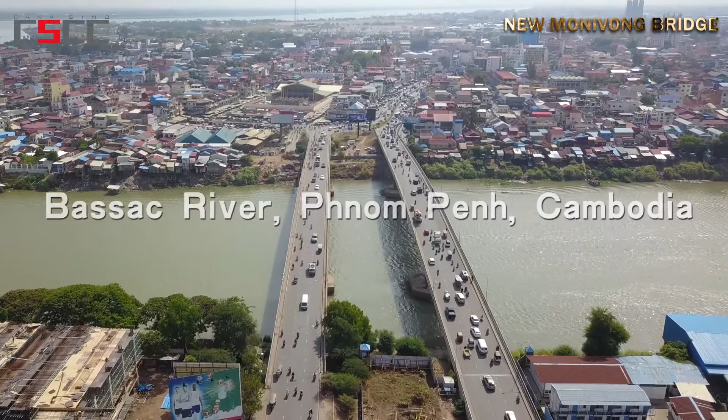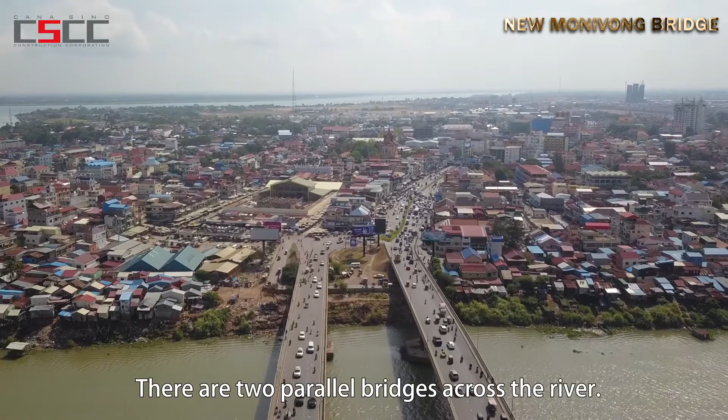Bassac River, Phnom Penh, Cambodia. Located at the intersection of the Chamkarmon, Meanchey, and Chbar Ampov districts. There are two parallel bridges across the river. These are the Monivong bridges that connect the East Bank and the West Bank.

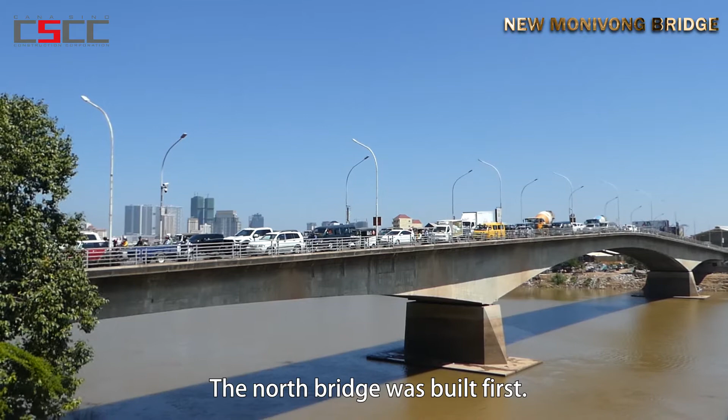These two bridges were not built at the same time. The North Bridge was built first. After that, Cambodia fell into a war for many years. It was not until the end of the century that the war gradually subsided. After entering the 21st century, the political situation became increasingly more stable. As the country developed, the original bridge became more and more congested.

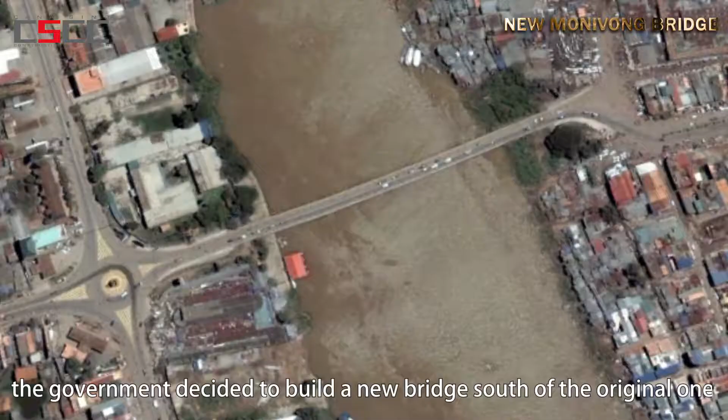For this reason, in 2006, the government decided to build a new bridge south of the original one. The new Monivong Bridge was built to improve traffic. Overseas Cambodia Investment Corporation invited Vietnam-based Cana Sino Construction Corporation to submit a tender, which they ultimately won, attaining the opportunity to take on this project. Since then, a journey of cooperation between two parties began.

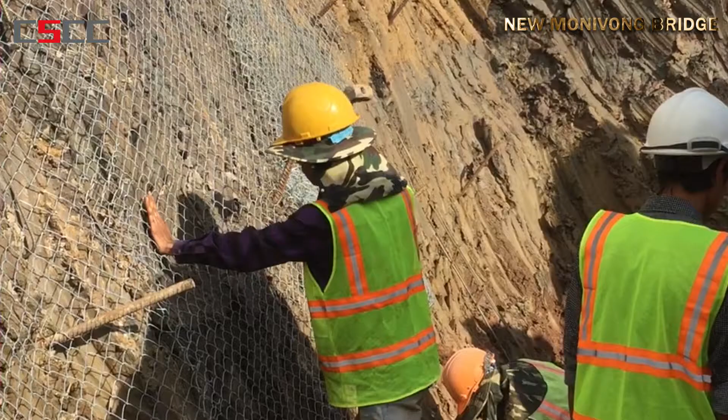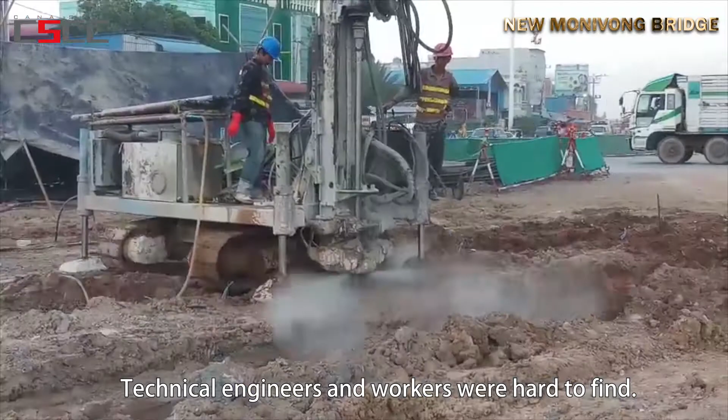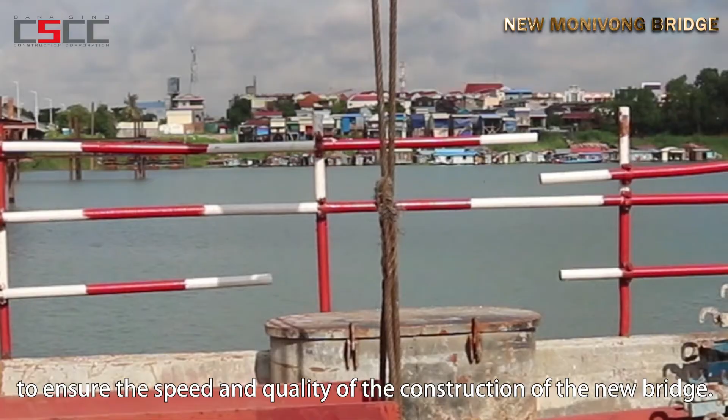The Civil War caused a lag in Cambodia's development. Technical engineers and workers were hard to find. Most construction sites used outdated equipment. To this end, the project team explicitly introduced barges, drilling rigs, cranes, and other materials from abroad to bring into this project to ensure the speed and quality of the construction of the new bridge.

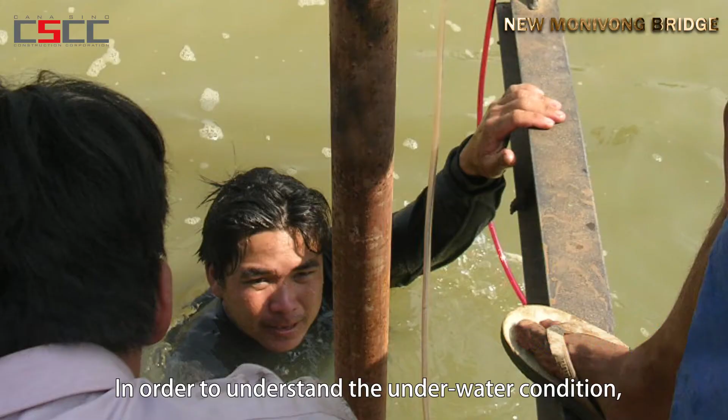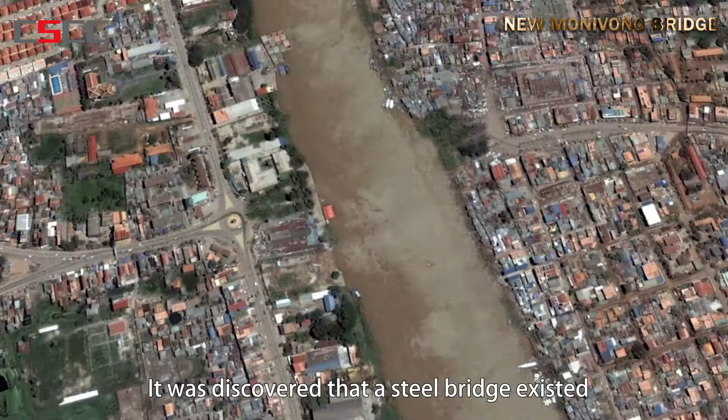During the construction of the bored pile foundation, the project team encountered a thorny problem. Some pile casings could not be placed on their expected positions. In order to understand the underwater condition, the project team not only performed further geophysical prospecting for the riverbed, but also searched around the vicinity. It was discovered that a steel bridge existed at this very location before. It eventually collapsed in the riverbed of the proposed construction area.

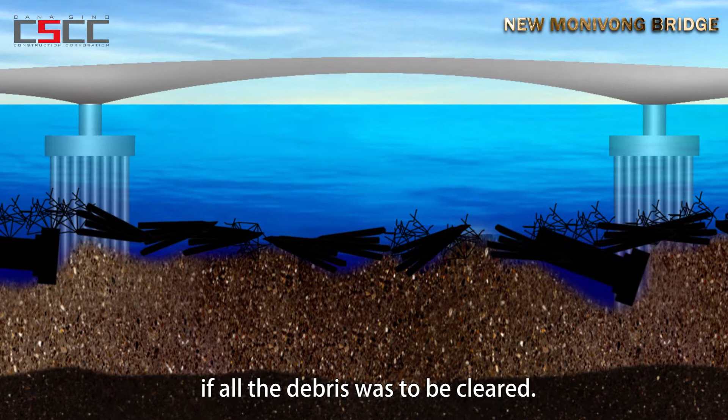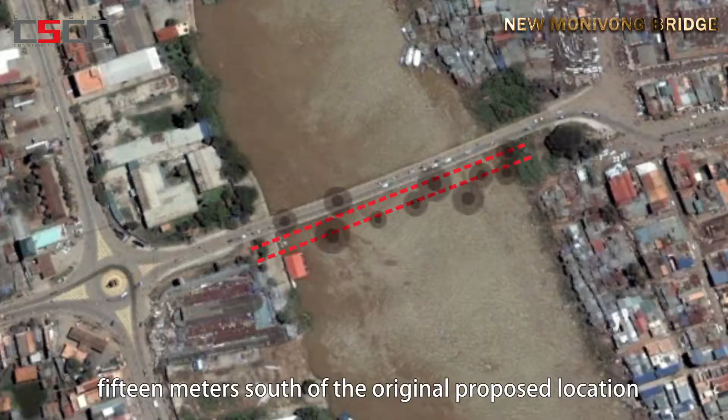A large-scale salvage effort would be necessary. If all the debris was to be cleared, this would affect the safety of the current existing bridge. The project team decided to move the location of the proposed bridge 15 meters south of the original proposed location, to avoid the debris and reduce the salvage range. In general, there were three types of debris to clean up.

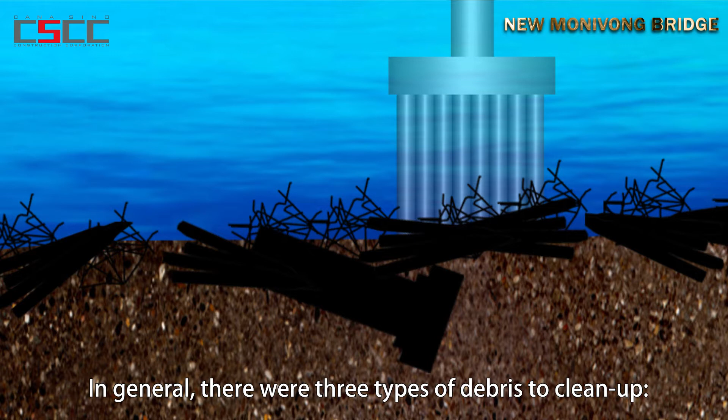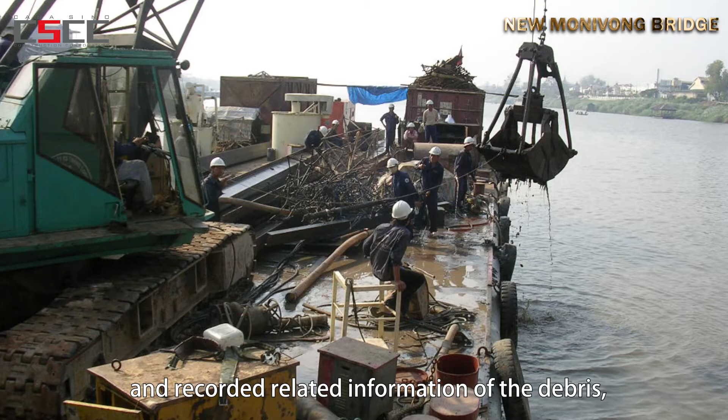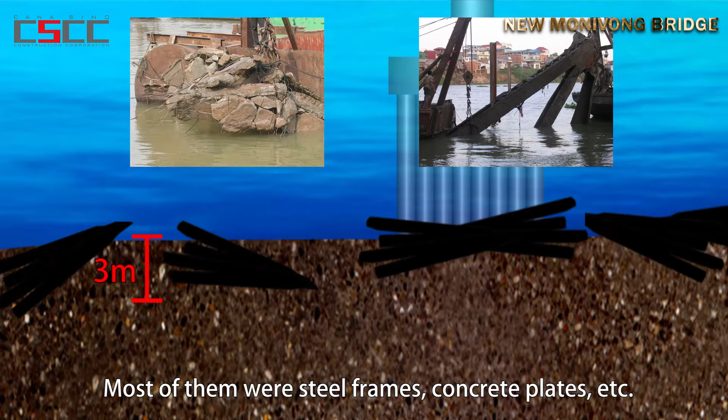The first was the debris lying on the surface of the mud. Most of them were rebar, wire meshes, etc. The project team tied floating empty bottles to the debris, which helped mark the position, count the number, and record related information of the debris, and enabled the team to salvage them one by one. The second kind was the debris buried 3 meters below the surface of the mud. Most of them were steel frames, concrete plates, etc. It was necessary to pump the surrounding mud first in order to increase the exposed portion of the target debris before salvaging it.

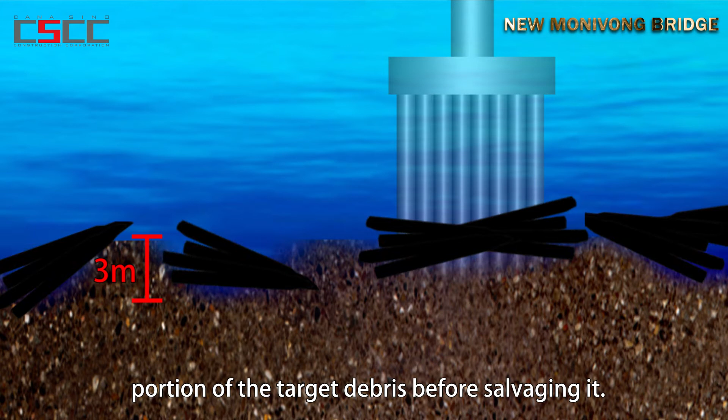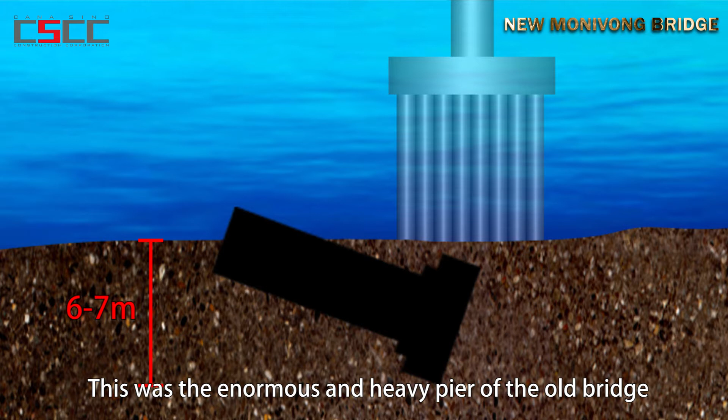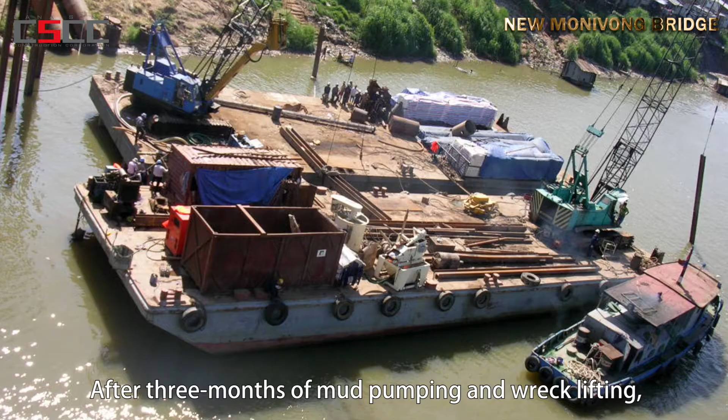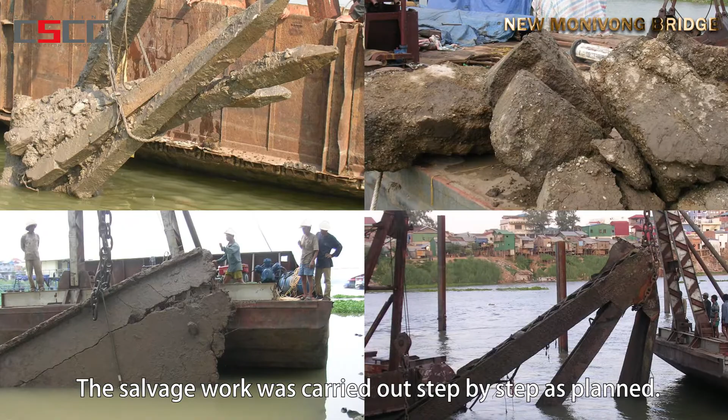The third kind was the debris buried 6 to 7 meters below the surface of the mud. This was the enormous and heavy pier of the old bridge that collapsed before. The size and weight greatly increased the difficulty of salvaging. After 3 months of mud pumping and wreck lifting, the target wreck could only be lifted to a location away from the construction location. The salvage work was carried out step by step as planned. With the completion of the cleanup, all steel casings could finally be placed in their expected positions.

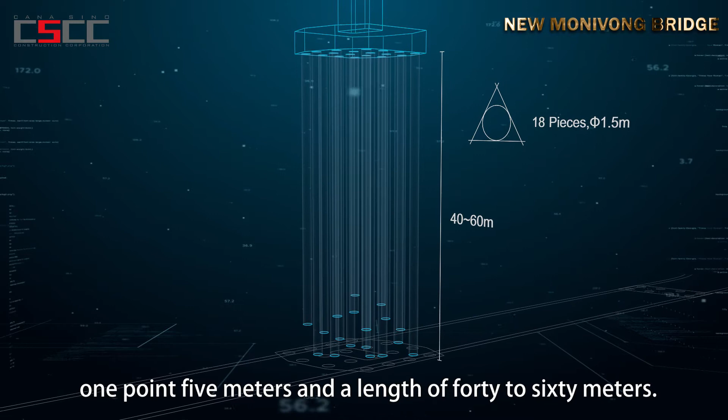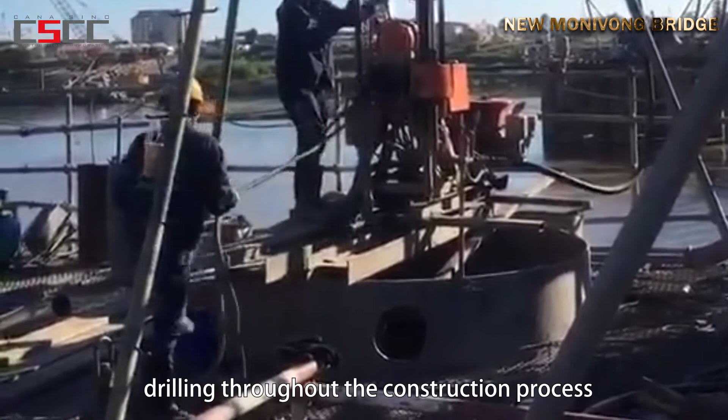The new Monivong Bridge was supported by 2 main piers. Each pier was composed of 18 piles with a diameter of 1.5 meters and a length of 40 to 60 meters. Each pile had a different length. This required the project team to keep performing the geologic drilling throughout the construction process, and substantially increased the difficulty of construction.

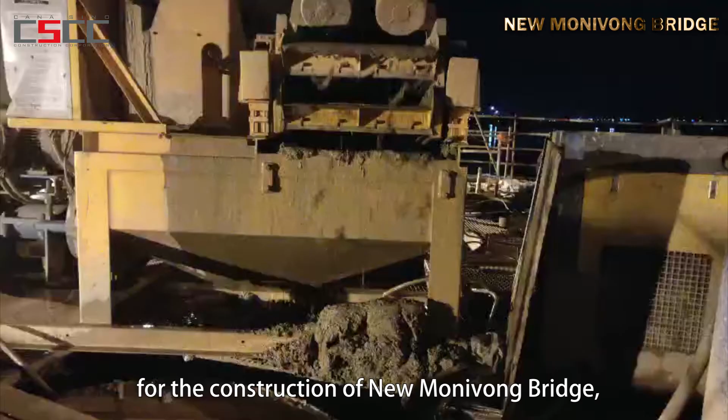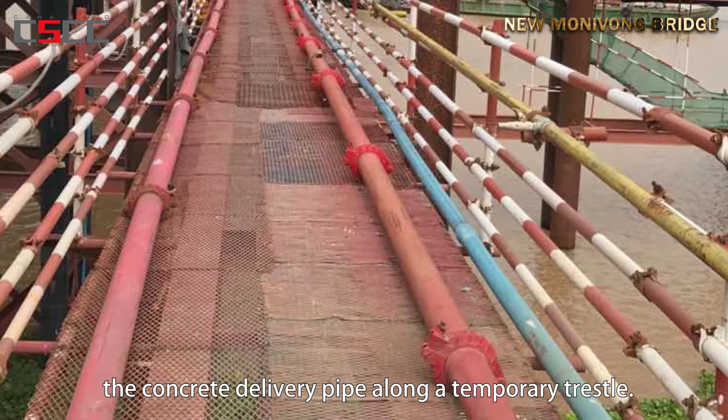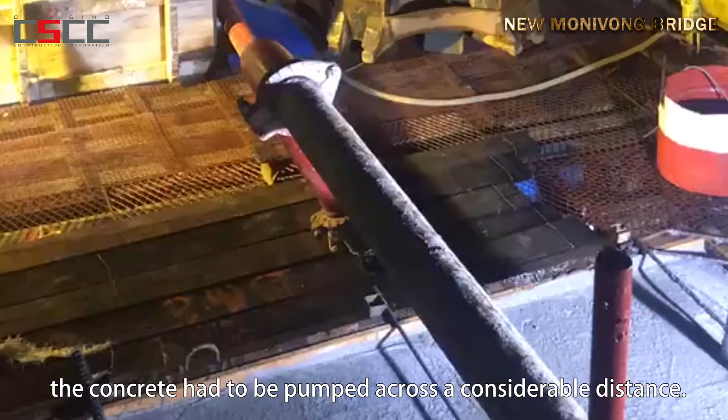As for the concrete needed for the construction of the new Monivong Bridge, 3 features were required: workability, flowability, and retardability. Why was the workability of concrete required? In order to save costs, the project team installed the concrete delivery pipe along a temporary trestle. The concrete was delivered across long distances. During the construction of the bridge, the concrete had to be pumped across a considerable distance. This could only be accomplished by using concrete with good workability. Otherwise, the concrete could block the delivery pipe or even cause broken pipes.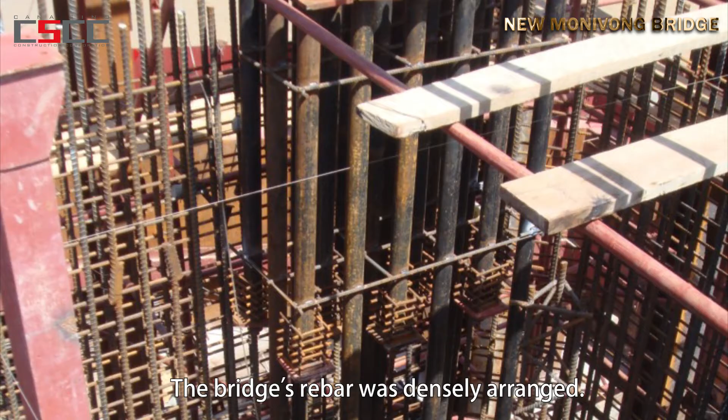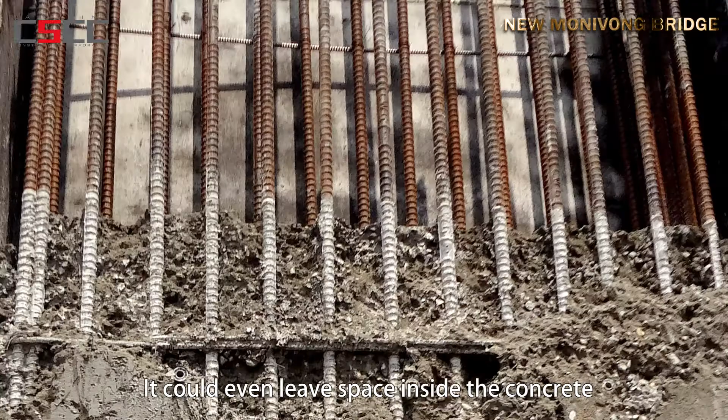Why was the flowability of concrete required? The bridge rebar was densely arranged. If the concrete flow was insufficient, it would experience difficulty in vibrating and the surface of the concrete would appear honeycombed and pockmarked. It could even leave space inside the concrete and cause the separation of concrete and reduce its strength. Concrete with high flowability has the benefit of more effective concrete pouring.

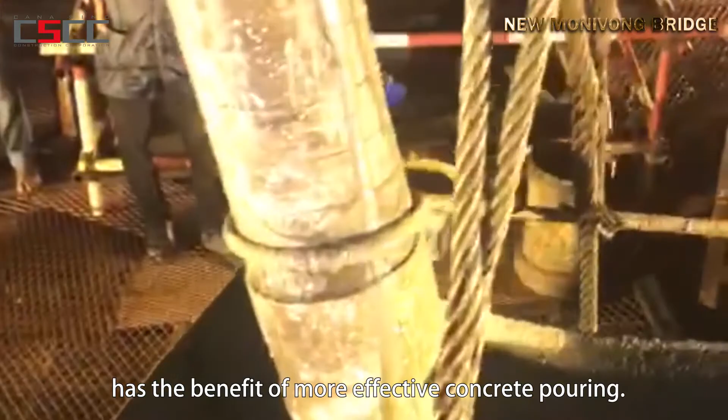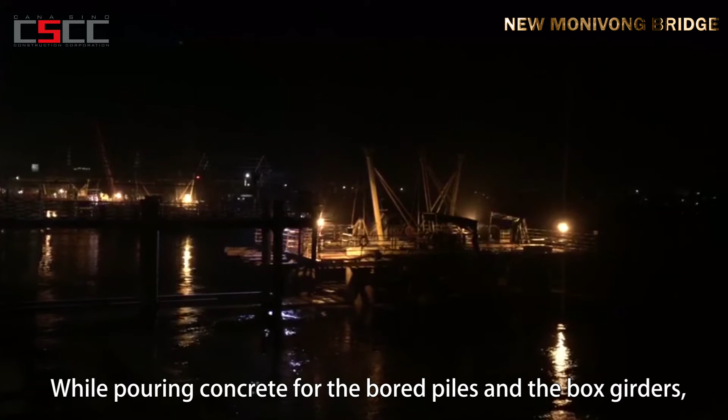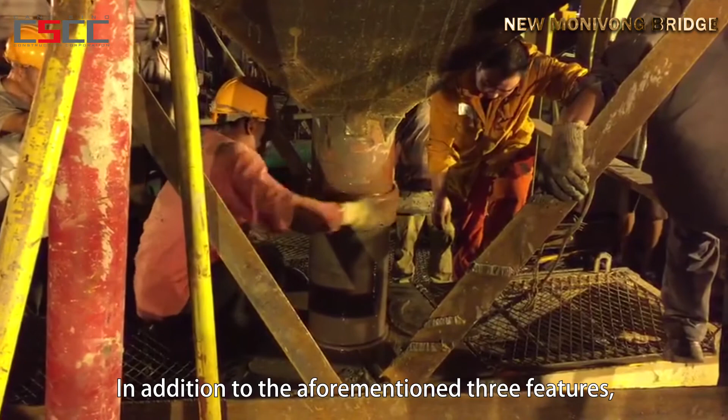Why was the retardability of concrete required? The normal initial setting time of concrete is between 1.5 to 2 hours. This type of setting time cannot meet the needs of the bridge construction. At least 5 hours are required for the concrete pouring of one bridge pile. In case an extraordinary situation happens, it may even take up to 8 hours. While pouring concrete for the bored piles and the box girders, cold joints can easily be created if the initial concrete setting time is too short. In addition to the aforementioned three features, both tensile strength and anti-cracking properties are required.

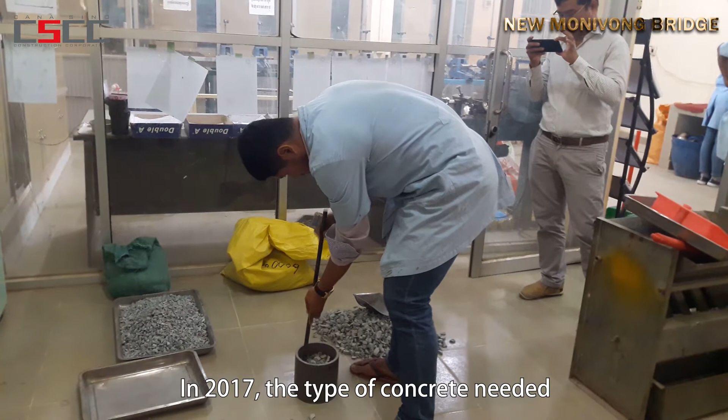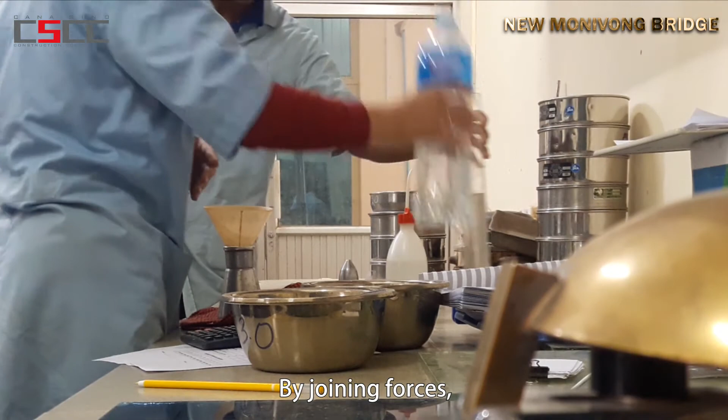In 2017, the type of concrete needed for the construction project could not easily be found in Cambodia. In order to produce satisfactory concrete, the project team provided technology to support local concrete batching plants. By joining forces, the team performed repeated rounds of adaptation.

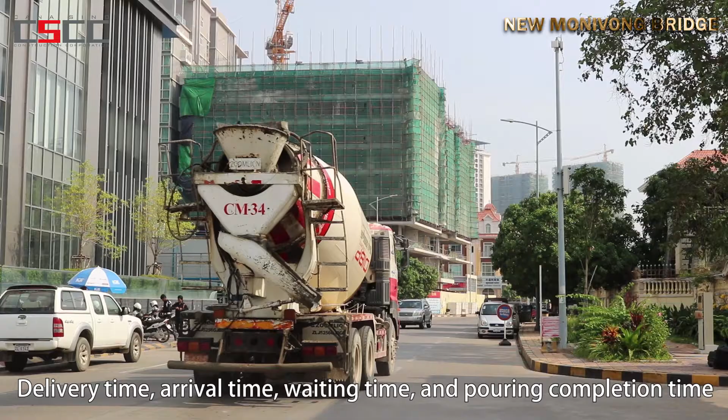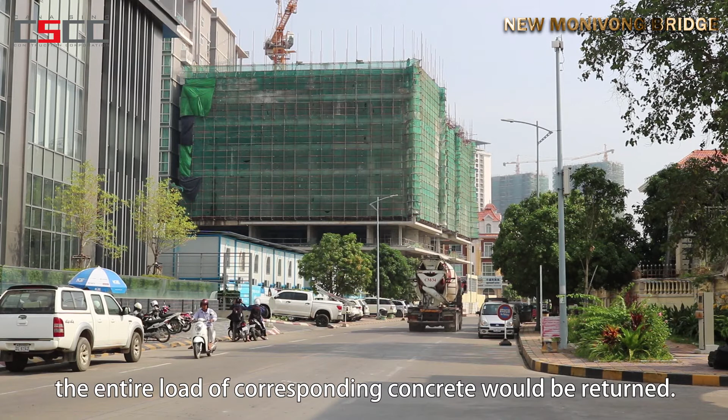For the supply of concrete, a strict system of tracking and managing was implemented by the project team. Delivery time, arrival time, waiting time, and pouring completion time were all carefully checked and inspected. If anything went beyond the allowable time, the entire load of corresponding concrete would be returned. As a critical and rigorous step of the process, no mistake was allowed.

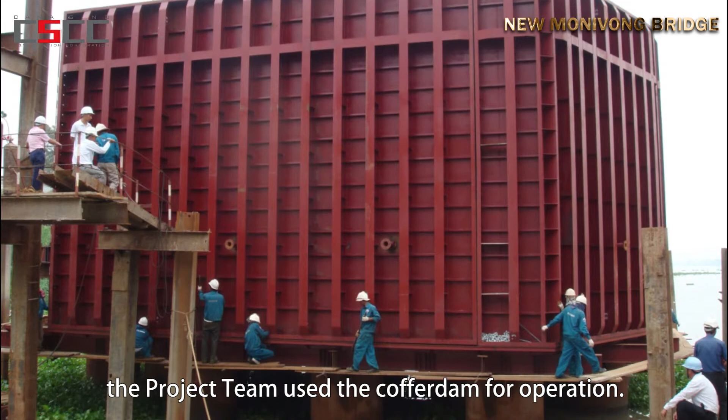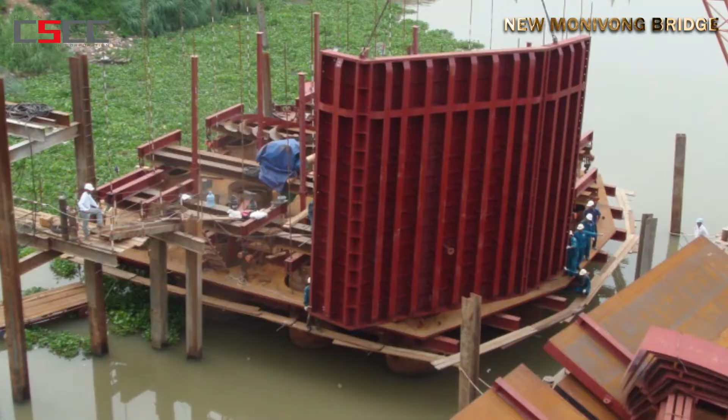For the new Monivong Bridge, the height of the bearing platform is 3.5 meters and the height of pier is 6.84 meters. For the construction of the bearing platform, the project team used the cofferdam for operation. The steel panels were utilized to fence in all sides and seal the bottom, to form an enclosed space with an opening on top. The weight of a completed cofferdam was up to 200 tons.

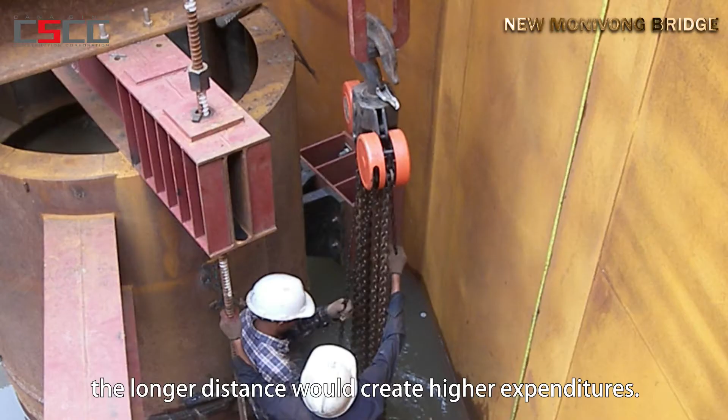There were no large hoisting barge ships available in Cambodia and nearby countries at that time. If one was imported from a country farther away, the longer distance would create higher expenditures. In order to reduce the cost, the project team chose to utilize manual chain blocks to lift the cofferdam down. If the tempo of lifting down by each chain block was different, uneven stress would be created.

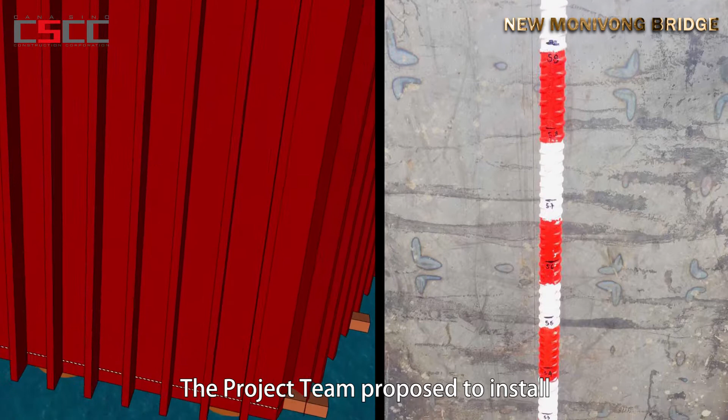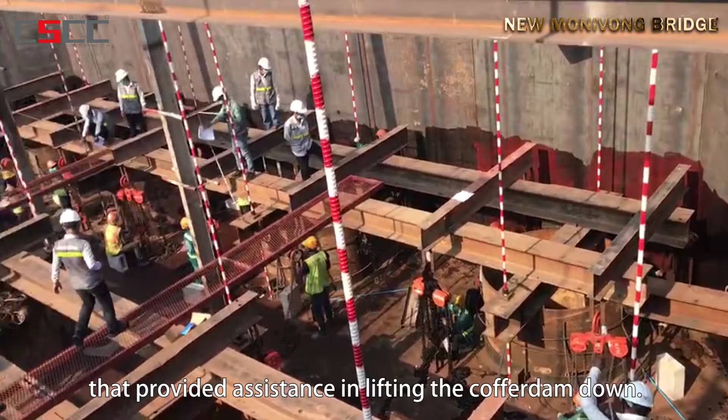The project team proposed to install 28 12-meter-long rebars as bearing booms. In addition, this was used as a staff gauge that provided assistance in lifting the cofferdam down. After all preparations were done, 60 workers under the command of one foreman lifted the cofferdam down in unison. After more than 20 hours of labor, the cofferdam was finally lifted down.

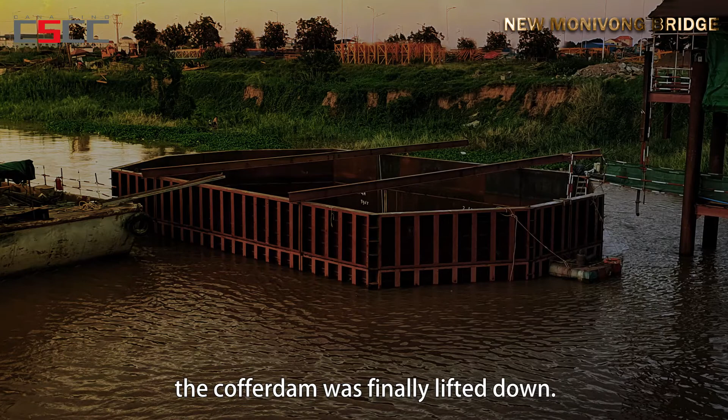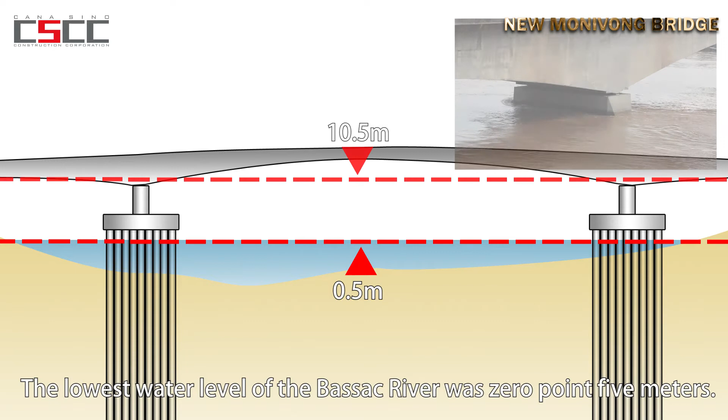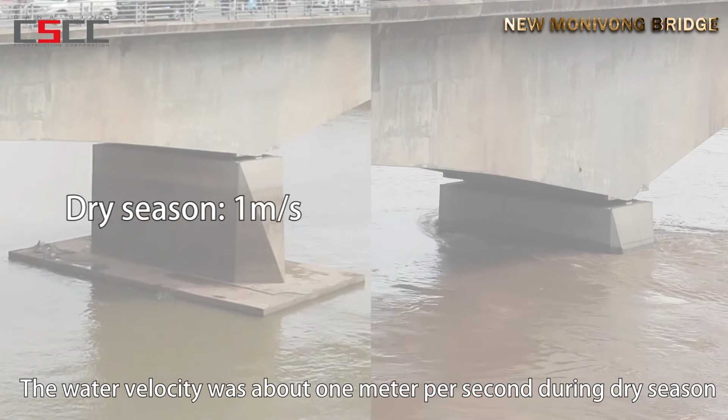The lowest water level of the Bassac River was 0.5 meters. The highest water level was 10.5 meters, making the water level drop up to 10 meters. The water velocity was about 1 meter per second during dry season and 2.5 meters per second during flood season. The water level rises at a speed visible to the naked eye. This construction was a race against time.

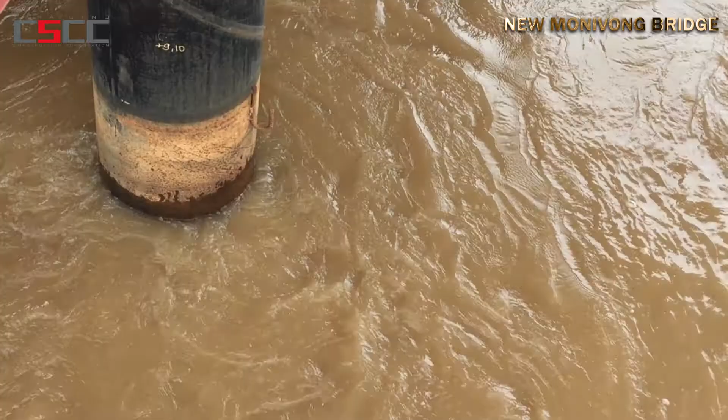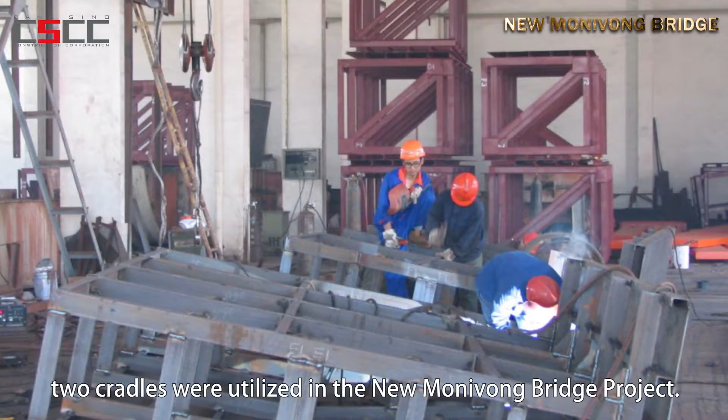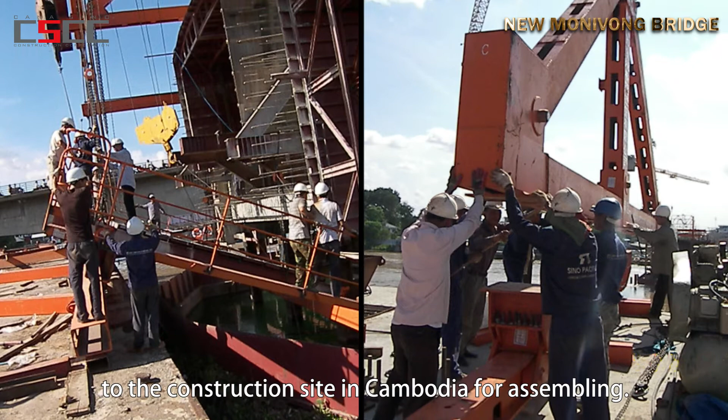Bridge construction is very dangerous work, surrounded by turbulent water. The available working area is narrow and congested. In order to enhance the safety of construction, 2 cradles were utilized in the new Monivong Bridge project. As no manufacturer in Cambodia could produce such a large piece of equipment at the time, the project team had to order individual customized parts from a factory in China, which were then delivered to the construction site in Cambodia for assembling. These 2 sets of equipment played a critical role in the construction speed and quality.

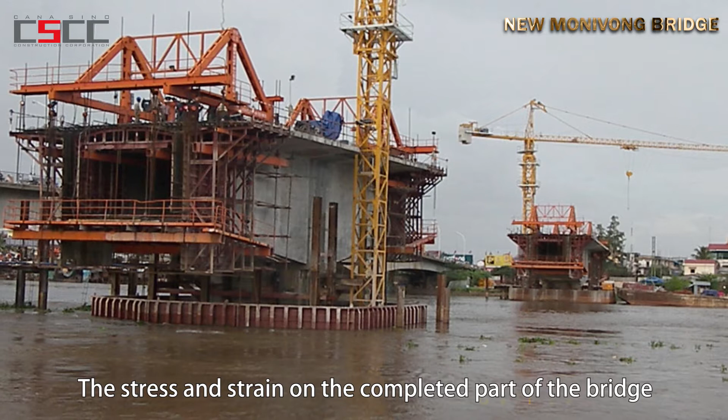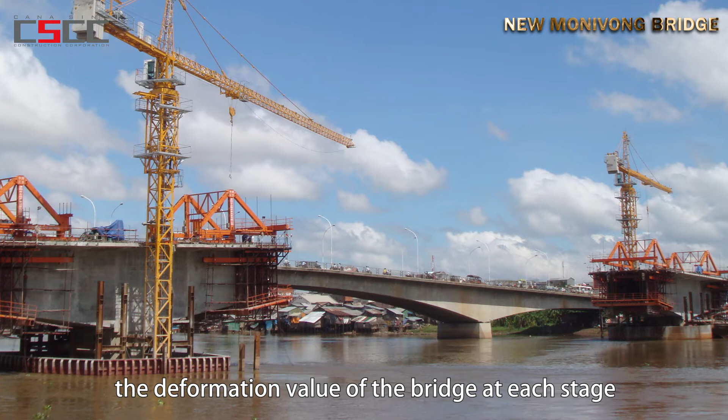The stress and strain on the completed part of the bridge during construction are deeply affected by the aquatic environment. During the construction process, it is necessary to accurately grasp the deformation value of the bridge at each stage, in order to close the bridge from both sides precisely. The project team assigned a commissioner to observe the construction.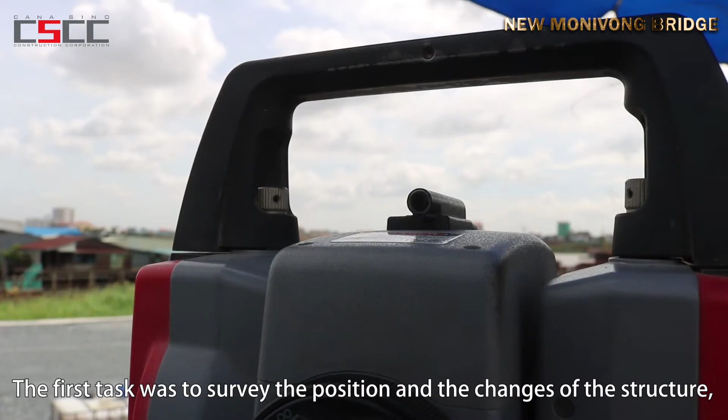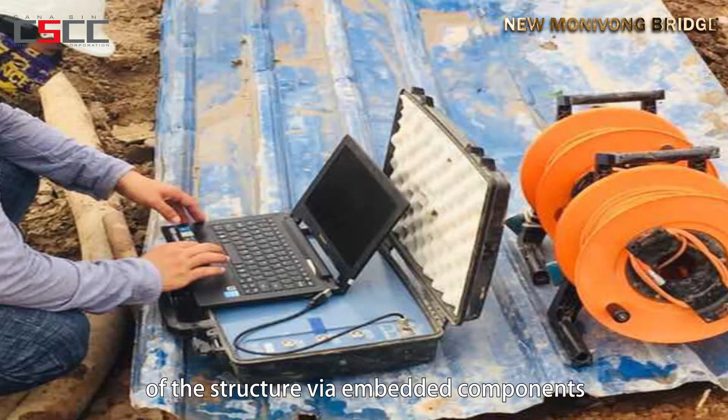The first task was to survey the position and the changes of the structure, such as the elevation and location of box girders. The second task was to test the internal stress of the structure via embedded components, such as the stress of concrete, pre-stressed rebar, etc. This not only provided data for construction but also provided reference for predictive analysis.

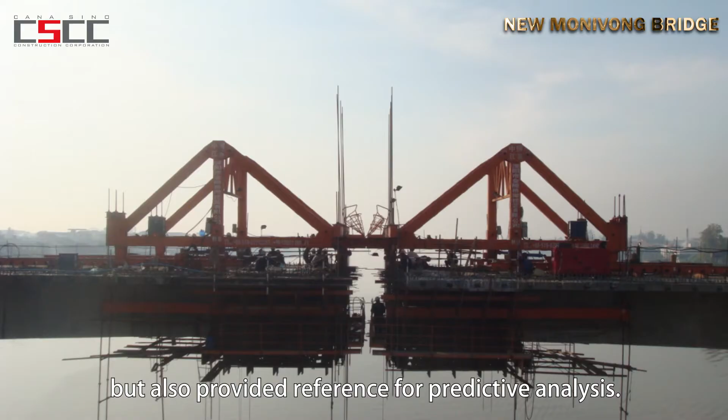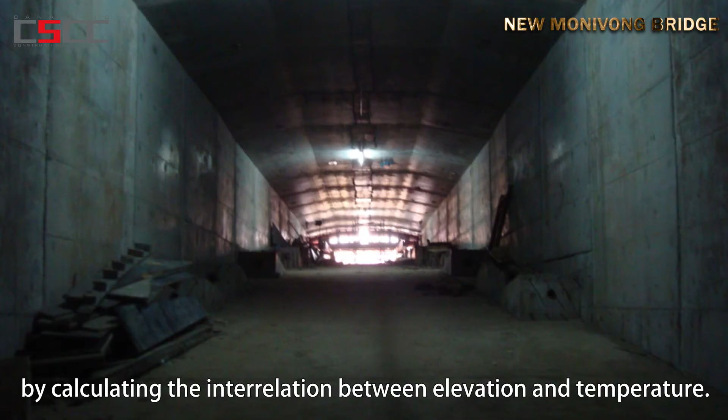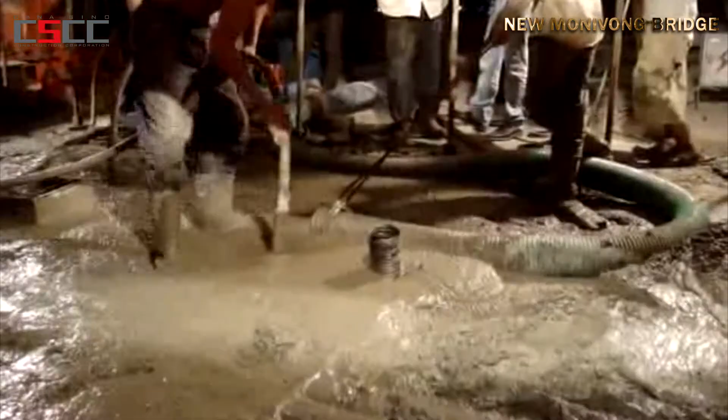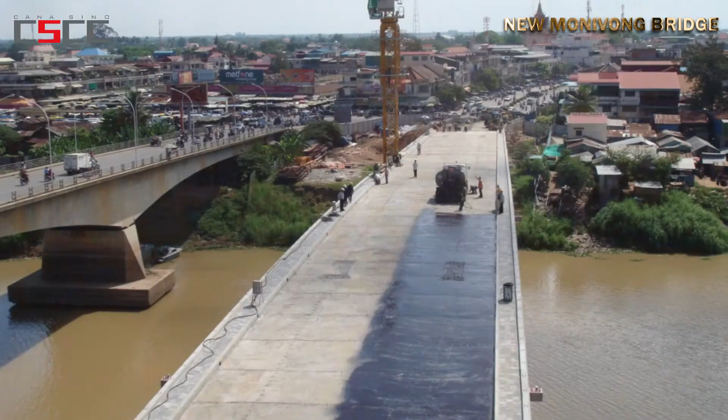During the process of closing, the temperature must be controlled at 25 to 29 degrees Celsius by calculating the interrelation between elevation and temperature. In this particular location, this temperature range was best at night. When night fell, concrete pouring began. Working hard throughout the night, the bridge was finally closed smoothly. The remaining work was to build deck structure and auxiliary facilities, such as laying pavement, installing guardrails, and removing construction equipment, etc.

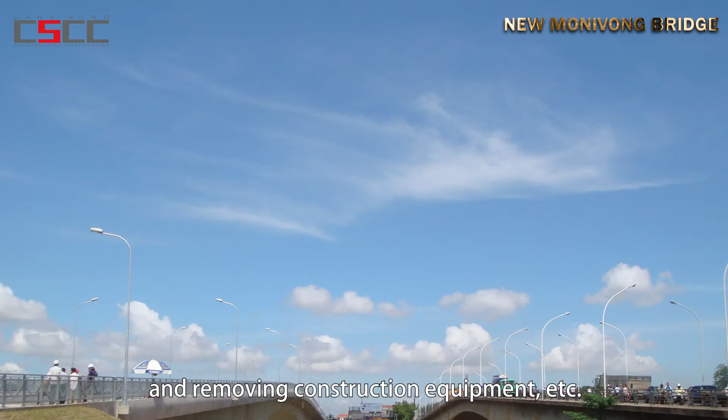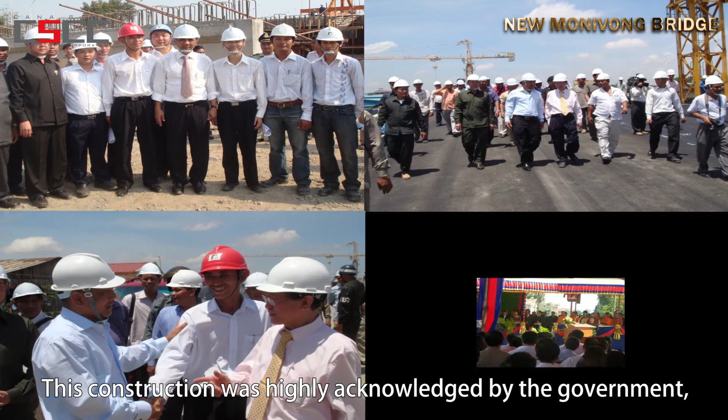After the bridge was finally completed, the whole of Phnom Penh was caught up in celebration. This construction was highly acknowledged by the government, the client, the consultant, and the local people. The ribbon-cutting ceremony of the bridge was hosted by Cambodian Premier himself, Mr. Hun Sen. A special medal was awarded to the General Director of Cana Sino Construction Corporation at that time, Mr. Chang Pei.

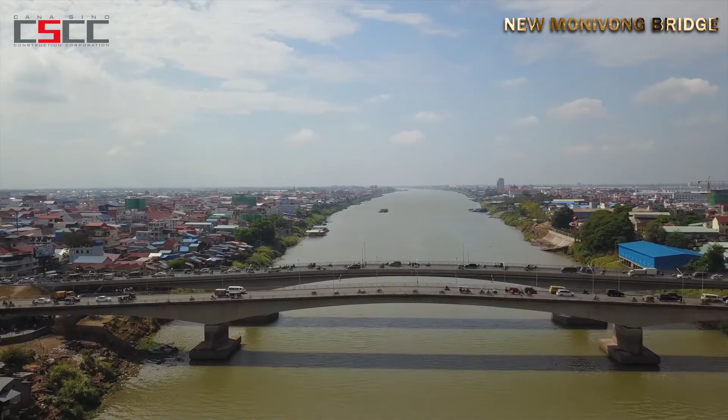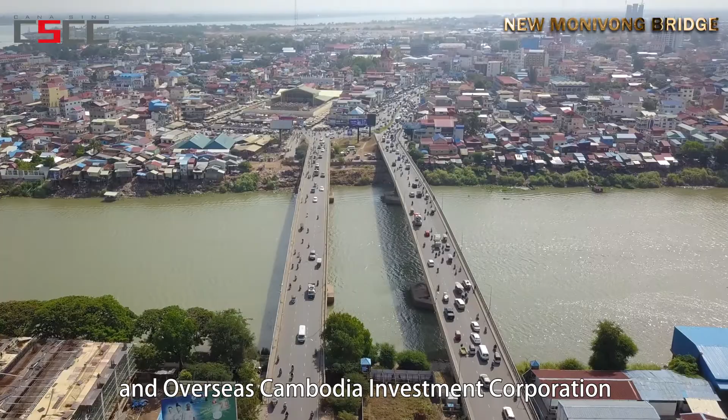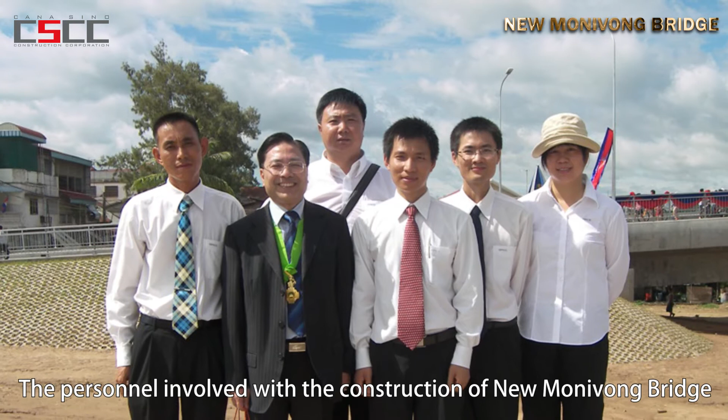The success of this project established the confidence of both the Cambodian government and Overseas Cambodia Investment Corporation towards Cana Sino Construction Corporation. The Overseas Cambodia Investment Corporation and Cana Sino Construction Corporation established Cana Sino Construction Corporation as a joint venture company in 2012. The personnel involved with the construction of new Monivong Bridge became the backbone staff of the new company. Under the effort and operation of these staff, the company began with less than 20 people and has increased to nearly 200 people at present.